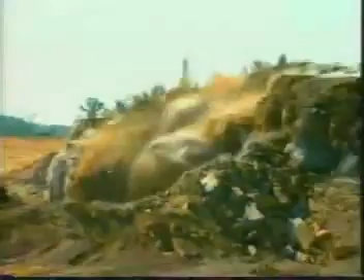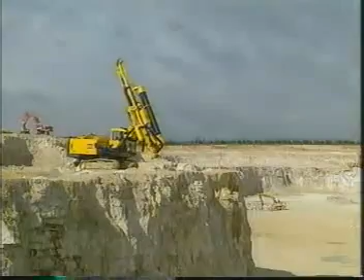Every day, all over the world, millions of tracked machines are at work in agriculture, construction, mining, and other industries. A third of these machines are moving on Berco undercarriages.

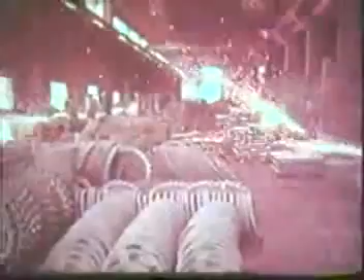The company was founded in Copparo, near Ferrara, Italy, in 1920, when Vezio Bertoni opened a little repair workshop. He and his partner, Roberto Cotti, called their business the Bertoni and Cotti Mechanical Workshop, which led to the name Berco.

Gianni Bertoni, Vezio's son, joined the company in the 60s, and in just a few years the Berco workforce grew to 2,000. When his father died in 1977, Gianni transferred 50% of the business to the German multinational Krupp, which subsequently took over the entire company stock in 1986.

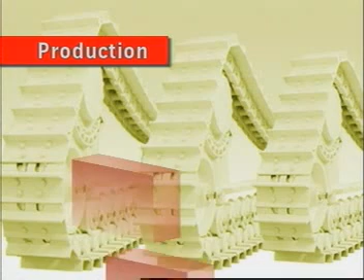Berco has expanded over the years, with factories in Castelfranco, Veneto, and Busano being added to the original Copparo factory. Every year, Berco produces over 250,000 tons of finished product, with a turnover of more than €500 million, providing work for over 3,000 people.

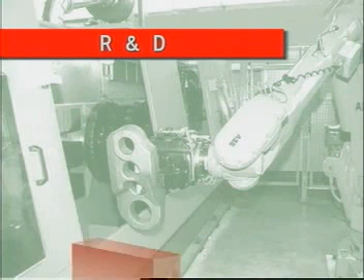Berco invests continuously in product and process improvement, spending over €30 million a year on research, development, and new machinery.

Berco is part of ThyssenKrupp, the Dusseldorf-based German multinational, a major company in the world steel industry and a leading manufacturer of components, machine tools, and plant engineering systems.

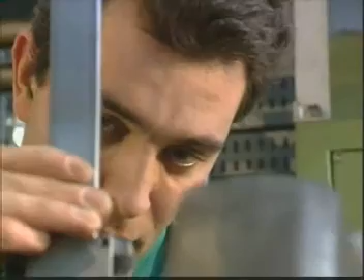With a constant eye to the quality of its products, Berco controls every phase of the production process, from the design stage right through to the delivery of the finished product. The new ISO 9001 Vision 2000 directives were implemented in the company several years ago.

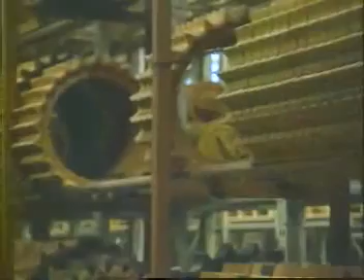Berco has been ISO 14001 certified since January 2000, with the introduction of eco-compatible procedures and the opening of a new waste disposal facility in 2001 and a new water purification unit in 2002.

Every year, Berco produces 140,000 idler groups, 1,300,000 rollers, 180,000 track chains, 6 million track shoes, and 180,000 sprockets - a total of over 250,000 tons of finished product a year.

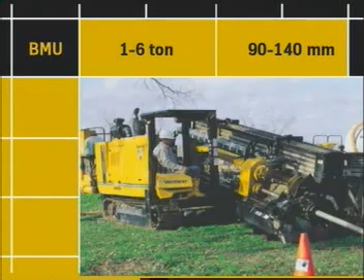In order to meet the wide-ranging needs of its customers, Berco is organized in 5 divisions. The Berco Mini Undercarriage Division produces undercarriage systems for machines weighing 1 to 6 tons, with track chain pitch ranging from 90 to 140 millimeters.

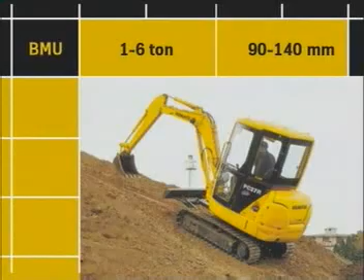The Berco Medium Range Division makes components for machines with weights ranging from 7 to 50 tons and chain pitch from 140 to 216 millimeters.

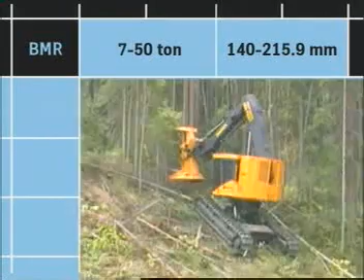The Berco Mining Products Division produces undercarriage systems for large-size machines with weights ranging from 50 to 300 tons and chain pitch from 216 to 350 millimeters.

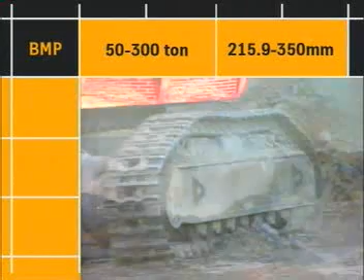Berco Rubberized Products offers a full range of components for machines with rubber-tracked undercarriages, from compact track loaders to agricultural tractors.

The Berco Service Division produces a complete range of equipment for servicing tracked machine undercarriages, including hydraulic presses, track shoe bolt torquing units, and track chain winders.

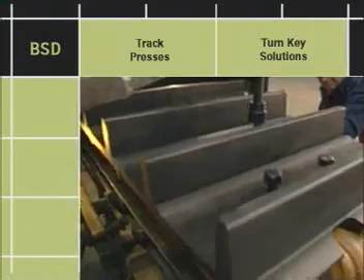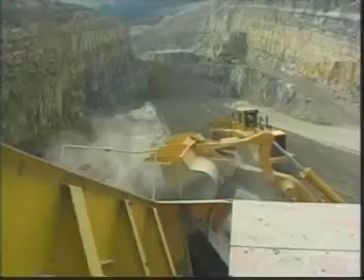Berco does much more than supply components. It also designs and builds complete tracked undercarriage systems, both for standard machines and special applications.

An important example of this is the CTL, Compact Track Loader project, in which Berco has developed 6 undercarriage systems complete with track frame and rubber track.

With its thorough knowledge of the product and the use of modern technology, Berco is able to help its customers right from the design stage, using dedicated software such as CAD and FEM to verify the strength of the components.

Computerized rapid prototyping machines are used to create 3-dimensional models, making it possible to assess the functional and appearance characteristics of individual components and assemblies before the production stage.

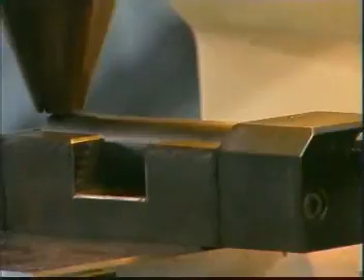The Materials Development and Metallurgic Laboratory uses highly advanced techniques to provide all the necessary support to the engineering management in the different production areas.

Wear resistance and mechanical properties are key factors in undercarriage component performance, and this is why Berco dedicates so much energy to materials research and development.

Wear tests are conducted on samples that have been subjected to different heat treatments in order to lengthen component life, even in the most extreme operating conditions.

Photoelasticity and strain gauge techniques are used to analyze the stress and fatigue states of individual components and assemblies.

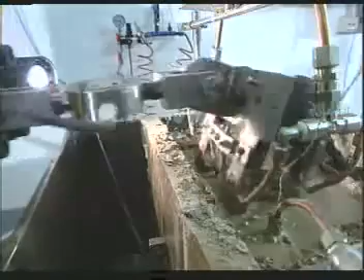Before going into series production, the components are sent to the Reliability Testing Department, where a full range of test machines help to greatly reduce the time and cost needed to optimize the finished product before the final field tests. After the laboratory testing stage, Berco completes its design procedure with a series of field tests on undercarriage system prototypes.

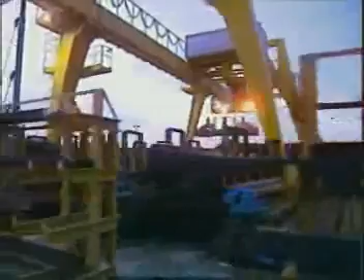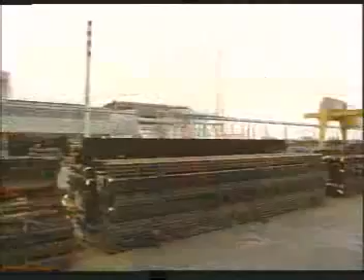The entire production process is managed and controlled internally, from the processing of the raw materials right through to the painting of the finished components, guaranteeing highly reliable procedures and constant quality.

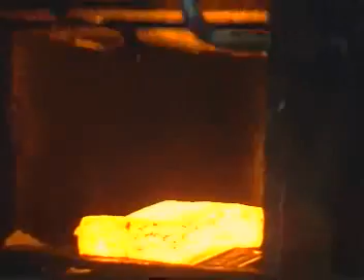Considerable resources are dedicated to the continuous development of core competencies, such as hot forging. A company's strong point is the 29 hot forging lines, which produce 15 million track links, over 2.5 million half rollers shells, and 700,000 sprockets and segments annually.

This massive forging production requires over 7,000 forging dies, produced inside Berco, either by electrical discharge machining or on high-speed work centers.

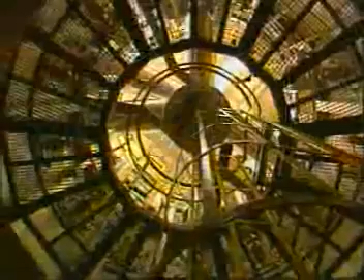The new hot forging line for large-size forged parts and mining components is a massive expression of Berco innovation in the forging field.

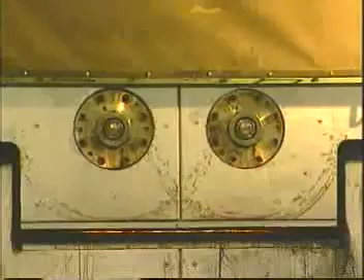The line, with its 32,000-ton screw press, produces idlers, sprockets, and sprocket rims. Previously, these components were cast and trimmed manually in a costly process.

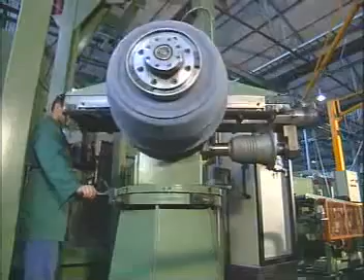The urge to bring a competitive edge into production technology has often led to the creation of totally unique, specially tailored solutions, such as the master split link process.

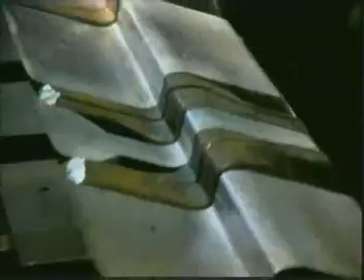This process uses innovative chip removal techniques with creep feed grinding, which has revolutionized the production process, streamlined the machining stages, and notably improved the quality of the end product.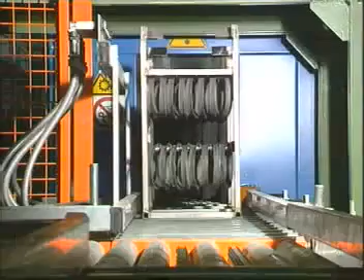Flexible, computer-managed production systems with sophisticated numerical control machines ensure even shorter retooling times in production changes.

The new roller brackets machining lines use flexible production systems with a combined operation of numerically controlled lathes, machining centers, measuring stations, and handling systems.

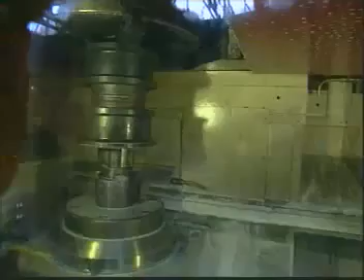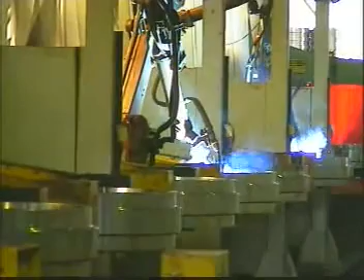The production of all front idlers, from fabricated idlers to complete idler groups, has been concentrated in the Castelfranco Veneto factory.

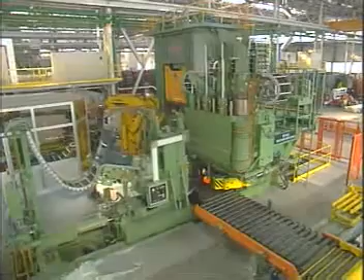The tread rims are produced on two highly modern multi-spindle circular ring rolling mills, the only ones of their kind, capable of rolling the component in a single operation.

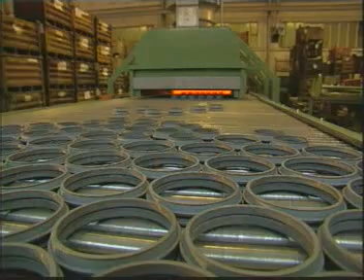In order to guarantee superior products with excellent wear resistance, Berco has, over the years, innovated and maximized all its heat treatment processes.

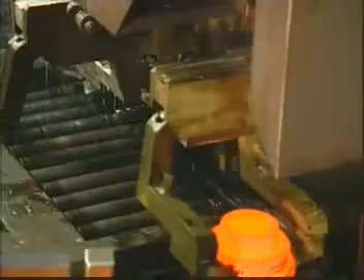There are over 100 heat treatment stations using techniques such as surface induction hardening and differential quenching, and equipment such as quenching and tempering process furnaces and case hardening furnaces.

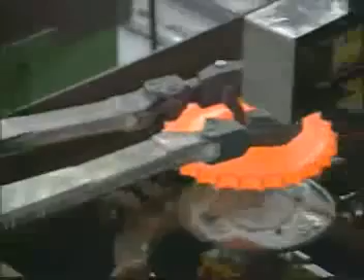Berco has opted for automation as the way to face up to the challenges of the new millennium. The company had its first robot installed in 1988, and now it has more than 300.

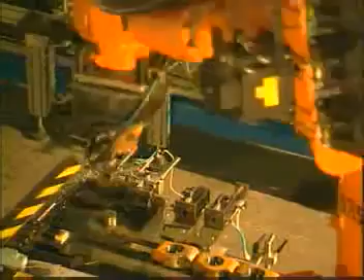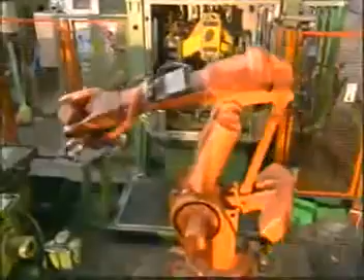Electromechanical handling robots, self-learning hydraulic robots, and Cartesian robots are used in a wide range of production applications. Examples include loading and unloading of machine tools, torquing of clamping equipment, and handling of the products in assembly processes.

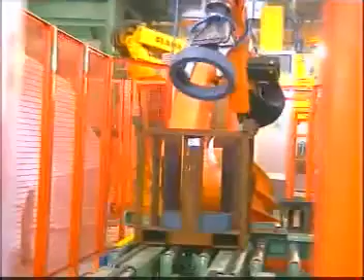The use of robots for the heavier and more repetitive tasks not only ensures high quality standards, but also gives support to human operators. The robot-assisted manufacturing lines are managed by computer-aided systems, which oversee all the process stages, right up to the final assembly and painting.

This innovative, highly automated production system allows Berco to strengthen its undisputed leading market position on a continuous basis.

A highly efficient logistics center capable of handling over 1,500 tons of product a day guarantees the rapid and effective dispatch of components to all customer destinations.

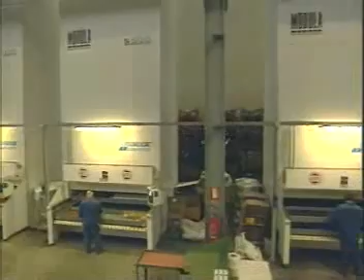Orders for small components can be processed quickly thanks to automatic, modular, computer-managed warehouses.

There are also production and logistics centers in Germany, the United States, and Brazil. Thanks to its efficient organization, BERCO is able to supply the assembly lines of the major earth-moving equipment manufacturers on a just-in-time basis.

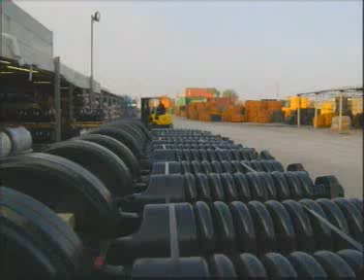With a network of over 200 local BERCO dealers, the availability of BERCO products can be guaranteed in all corners of the earth. With their long experience, readily available stock, and well-equipped workshops, BERCO dealers are able to offer the customer a top-quality service.

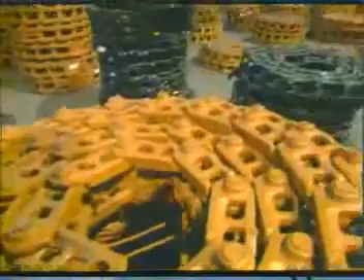Thanks to new communication technologies, BERCO dealers can now access a wealth of information in the undercarriage products database online and find the right answers quickly and easily.

Orders can also be managed in the same way, along with warranties and the main transactions between partners and customers. Refresher courses, tailor-made for specific dealer and customer needs, are organized for training both engineering and sales personnel.

BERCO offers assistance in choosing the right component for the job and also provides on-site support with a team of engineering experts.

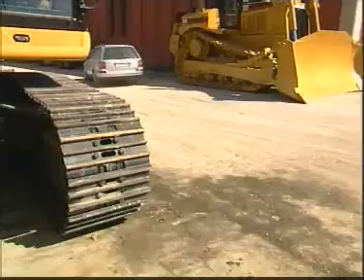Regular visits to customers to appraise undercarriage wear guarantees better product performance for lower machine maintenance costs.

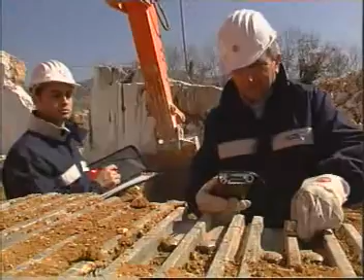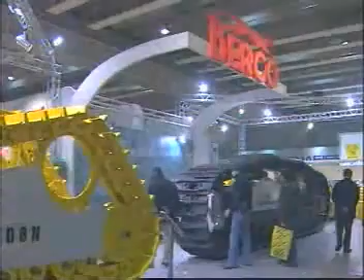BERCO supports its sales activities by attending all the main trade fairs in the industry and provides its dealers with the most effective marketing tools.

For BERCO, customer satisfaction isn't just an objective, it's a company philosophy.